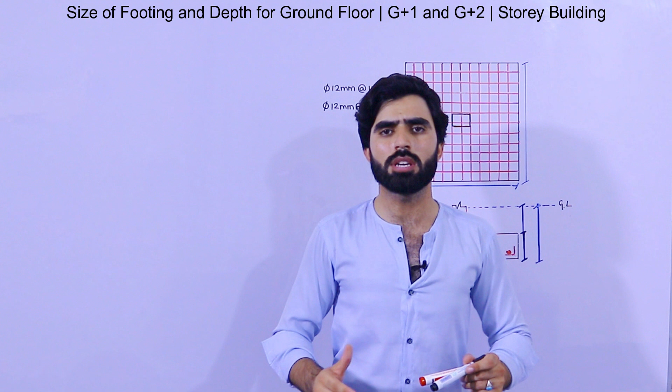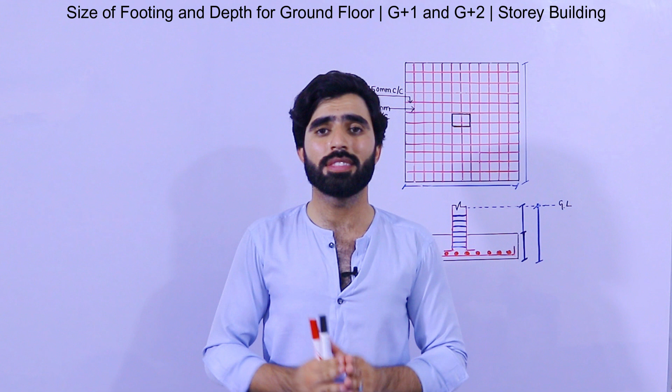Just I am guiding you for the size of footing, depth and its steel reinforcement from my personal experience. Because I see most people who want to construct their house, normally ground floor, sometimes ground floor plus 1 story or plus 2 story, are confused. Since their budget is low, they are not able to hire a structural engineer or have a supervisor during construction. So this video is especially for non-technical people, for domestic building, not for commercial building.

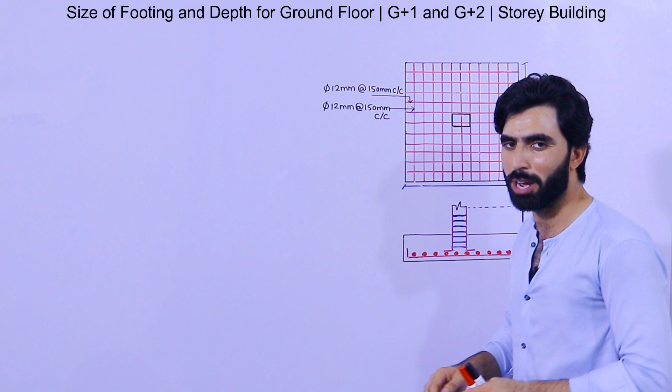Guys, you can see this is the RCC footing plan and this is its section.

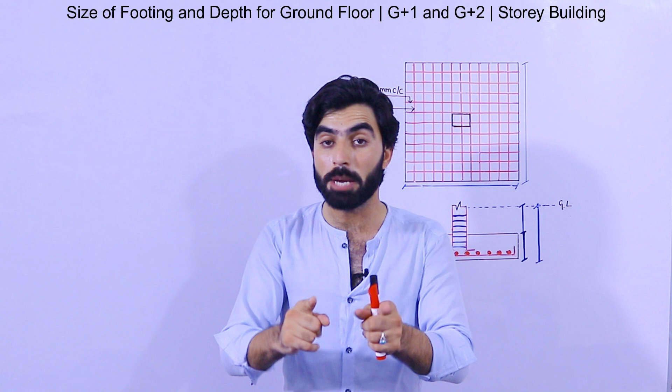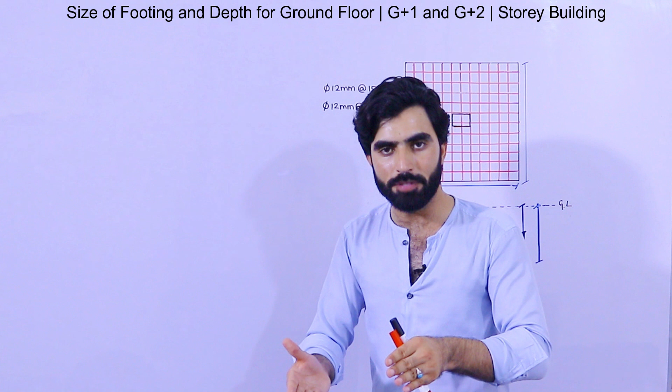First of all, you should take a proper decision if you want to construct your house. In the future do you want to construct G plus 1 story or just ground floor? If you want to construct just ground floor now but add a first floor later, after 5, 6 or even 15 years, you should take the proper decision beforehand. Otherwise you will face problems and won't be able to construct the additional stories. So this is the most important thing to decide.

So guys, for ground floor only, the first case: size of footing for ground floor, only ground floor, 1 story. What should be the size of the footing, its steel reinforcement, and depth, etc.

Remember guys, for only ground floor, if you don't want to construct a first floor in the future, for a normal residential building you can keep the size of footing from 3 to 4 feet. I recommend, if you don't want to construct a first floor in the future, 3 feet is okay. So 3 feet by 3 feet is the size of footing.

Now what should be the depth of the footing in that case? Guys, this is just for ground floor, so for the ground floor the depth should also be 3 feet, not 4 feet. Sorry for that mistake. So size is 3 by 3 feet and depth is also 3 feet.

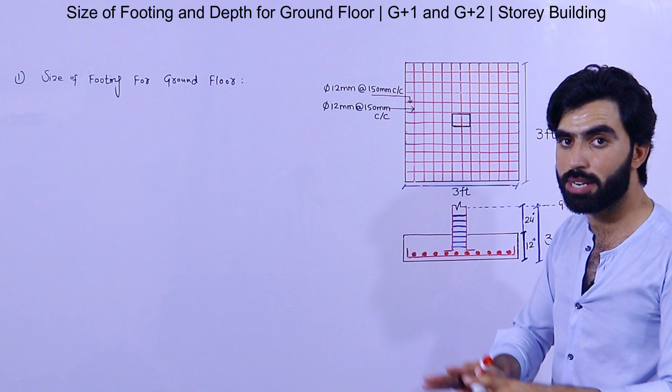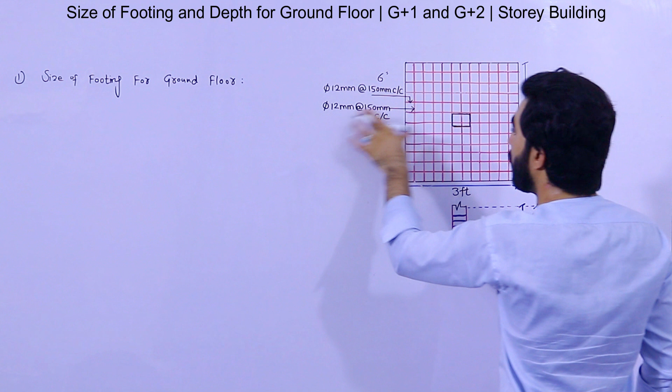Now for the steel reinforcement, what should be the size for main bars and distribution bars, and also its spacing. Use 12 mm bars with spacing of 150mm center to center, or you can say 6 by 6 inches, for main bars, and also for distribution bars you can keep 6 by 6 inches.

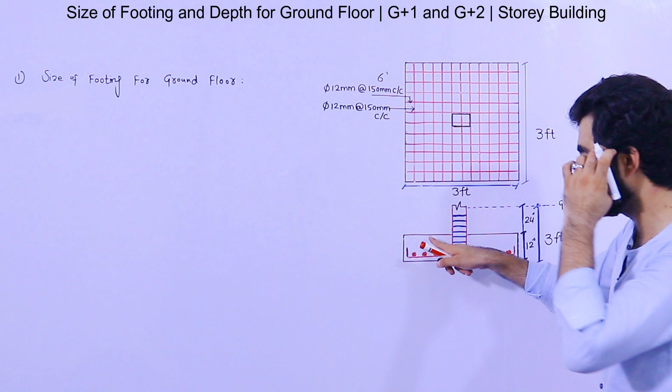So guys, this is the size of column, size of footing and its depth, steel reinforcement, etc. Now guys, we should provide a single mesh, not double mesh. And the development length, guys, you can see these hooks, it should not be less than 6 inches.

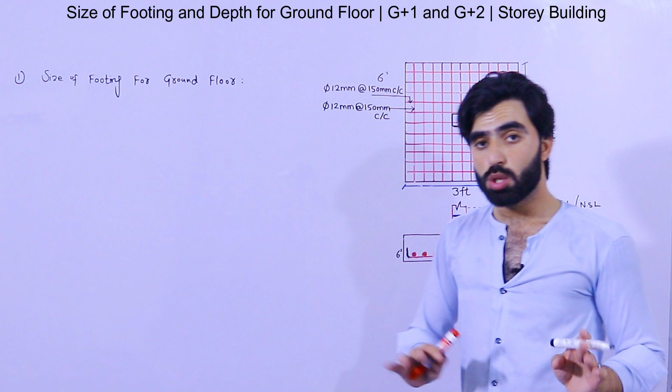This length, also this side, for ground floor only. So if you want to construct ground floor 1 story, let me write here: size should be 3 by 3 feet, and depth should also be 3 feet, and steel reinforcement should use 12mm dia with spacing of 6 inches center to center for both way. Got it? And for concrete, use M20 grade, ratio 1:1.5:3. So this is for ground floor.

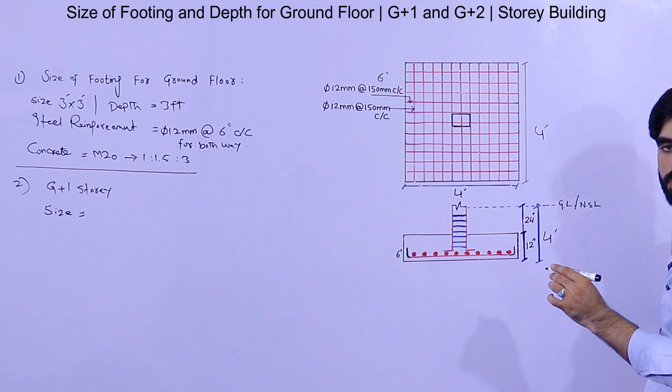Now guys, I will guide you for ground floor plus first floor. The second will be for G plus 1 story. So what should be the size? In that case, the size of the footing should not be less than 4 by 4 feet, and the depth of the footing should also be 4 feet. Where this should be 36 inches.

So 12 inches plus 36 inches. The steel reinforcement should be same for both way: size of the footing 4 by 4 feet, depth same 4 feet, and steel reinforcement same 12mm with spacing of 150mm or 6 inches center to center for both way. Got it? So this is for size and depth, etc., steel reinforcement for ground floor plus first floor, G plus 1.

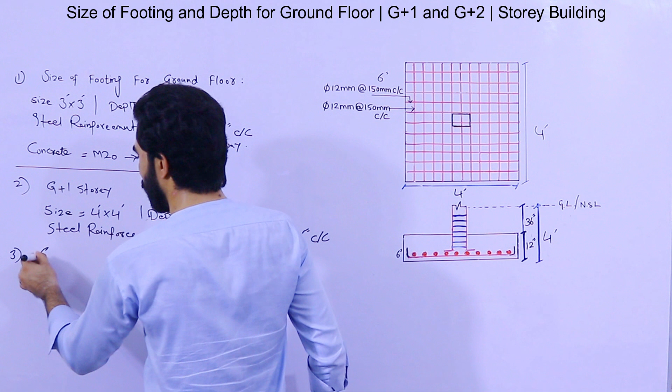Now the third step, G plus 2 story. It means guys, you can see here ground floor, then first floor, then second floor for 3 story. G plus 2 mean 3 story. So in that case guys, G plus 2 mean 3 story.

So here guys, you will use the size of the footing should not be less than 5.5 feet, or you can say 5 feet and 6 inches. Same 5 feet 6 inches. This is for ground floor plus 2 story for total 3 story, ground floor plus 2, G plus 2 story you can say.

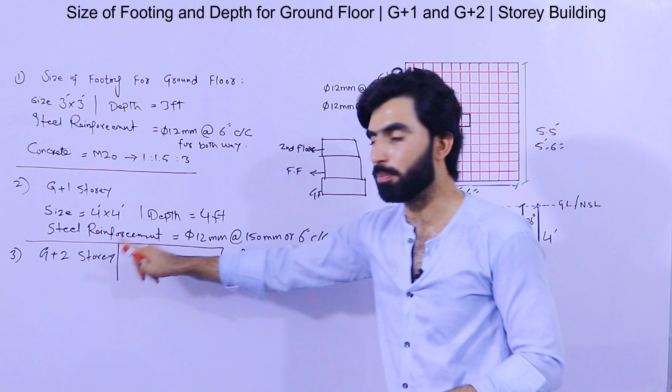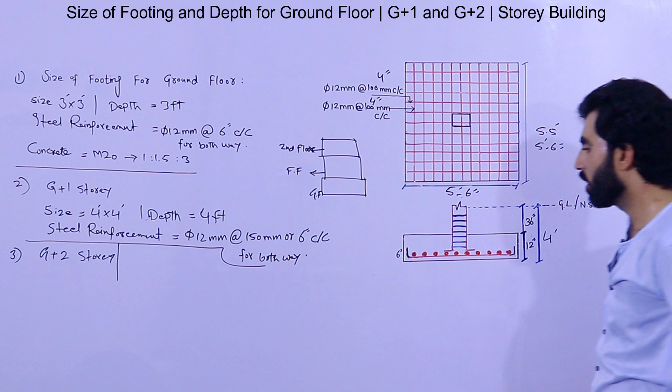So in that case the steel reinforcement should be changed, which should be 100mm for both way. Dia should be same, or you can say 4 inches on both way. But guys, here remember, for G plus 2 story we will provide the double mesh. Double mesh means you can see here, on the top of this you will also provide here like this. We will provide the steel reinforcement also for double.

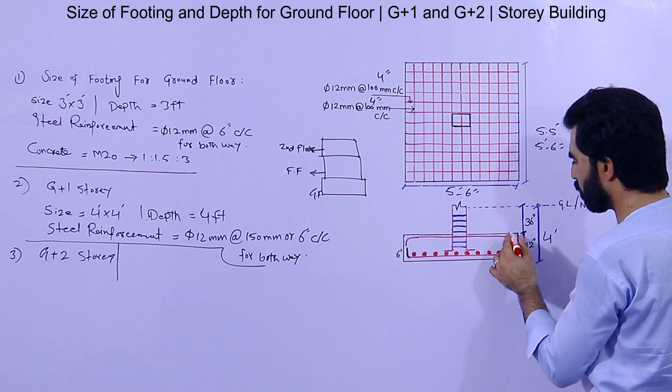And the hooks should be not less than 6 inches, same, it should be provided. Now guys, also in the column the legs should not be less than 12 inches also this side for the column. Because if you didn't watch the last video, the link is in the description of this video, size of column and its steel reinforcement I discussed already.

So here guys, the depth of the footing should not be less than 5 feet. It should be 5 feet. Just for domestic building, this design is not for commercial building, because I am telling you from my personal experience as I did different types of construction.

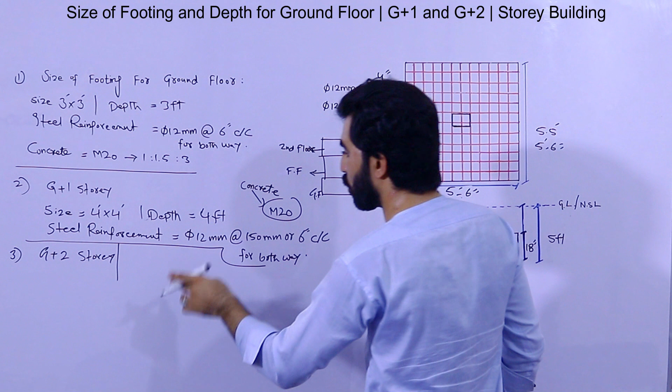So guys, here the depth of this should be 18 inches. About concrete, here you can also use concrete M20 guys, for G+1 as well as for G+2 you can use M20. So here the depth should be 18 inches, and on the other side this should be 42 inches, or you can say 3.5 feet. So 1.5 at the bottom, and 1.5 plus 3.5 is equal to 5 feet. So the depth should be 5 feet.

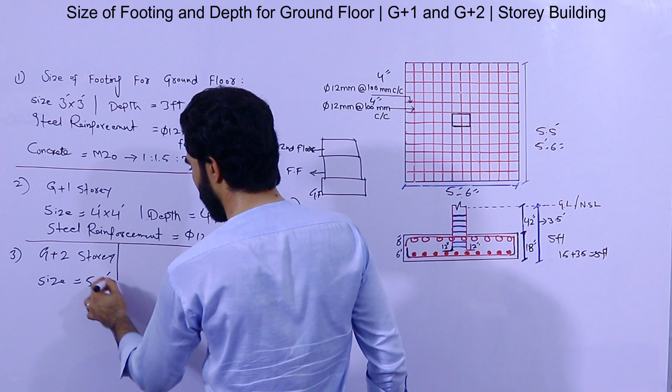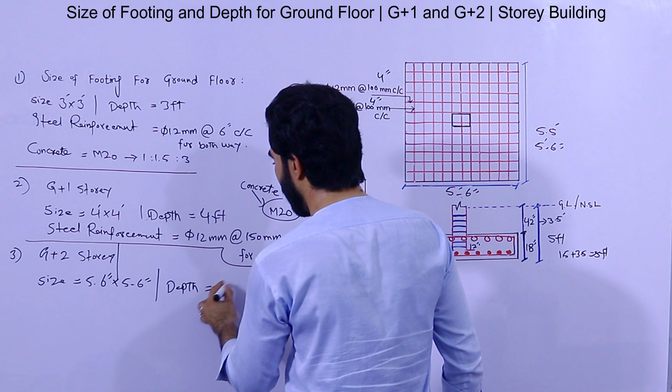Okay so guys, these are the steel reinforcement details etc. for this, G+2 story. So the size should be 5.5 feet, 5 feet 6 inch by 5 feet 6 inch, and the depth should be not less than 5 feet for G+2 story. This is for normal residential building, so if the soil condition is okay.

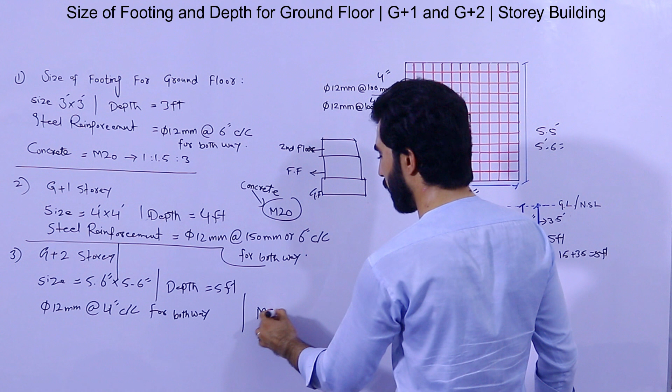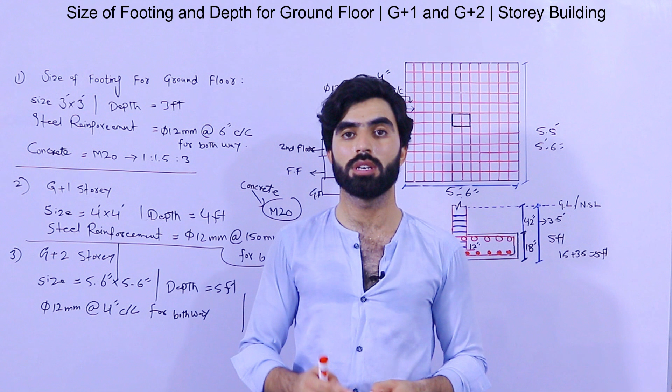Next guys, the steel reinforcement should be, the dia should be 12mm with the spacing of 4 inches center to center for both way, and the concrete should be M20, ratio 1:1.5:3. So this is the size of footing, its steel reinforcement, depth for ground floor plus first floor, and ground floor plus first floor and second floor, for 1 story, 2 story and 3 story for normal residential building.